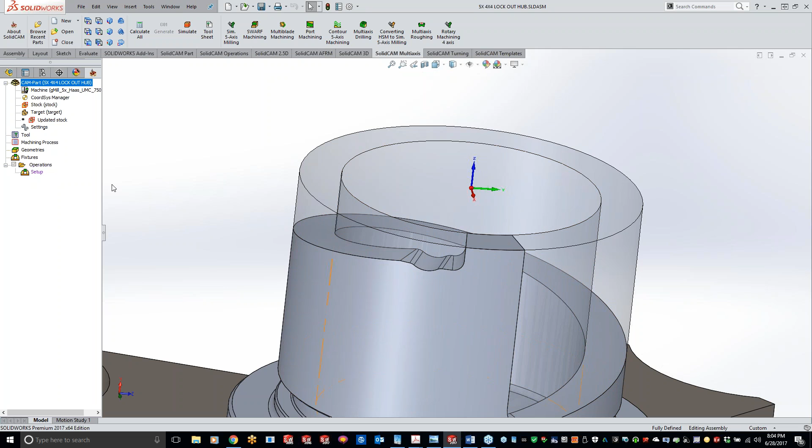All right, so right here, this is actually the 4x4 lockout hub off of the older F-150s. Greg got this part, and back in the day the Fords had a plastic one, and now this replacement is a metal one. So what we'll do first is let's just do our 3D iMachining.

And I'm just going to leave it on 3D General here. I'm gonna grab my tool, and we'll use tool number 1 here. And we'll just leave it at that. Let's just do a quick save and calculate here. And we got our toolpath in there.

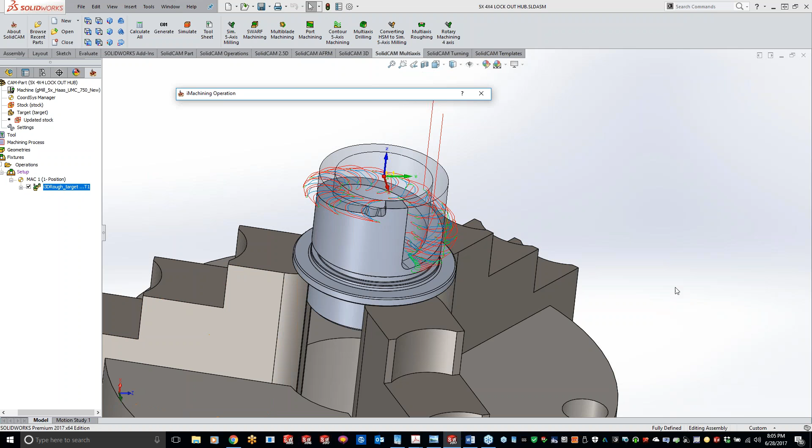The only thing I want to change is my scallop height. So if I go to technology, and instead of doing scallop, I'm going to do a constant of, let's just do 40 thou. Oops. Save and calculate.

And I know this is just a little bit of a refresh of 3D iMachining here, but I kind of want to take you guys from start to finish on these parts here. Okay, so let's do a solid verify. All right, so we have that completely roughed out, and you'll see that I left 15 thou on the wall and the floor. So now we can come back and do our 5-axis parallel to the curve.

So real easy to use. Pretty close to the same thing as what we went over last week here, but just go ahead and grab your parallel to the curve. Now my geometry is, whoop, let me get rid of my toolpath there. So my geometry is going to be all this top surface right here. I can click all the way around that, but I got it ready here for us.

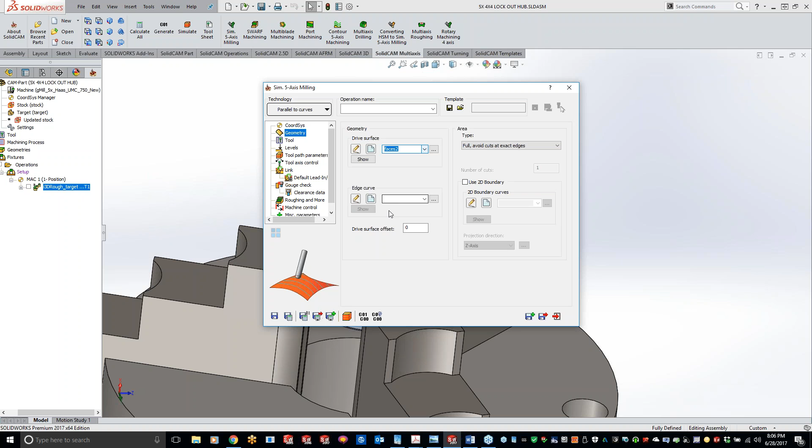Now the inside geometry that I want to use is the inside of the curve. And I think I got this one. So let me just do a show real quick. And basically just grabbing that inside curve geometry going all the way around. So you'll see kind of going around the parallel and then kind of coming back up there.

Now, what I want to do for this one is I just want to do somewhat like a trimming pass, but just want to do one cut. I don't care to do multiple step downs or step overs, anything like that. So I can come over here, just like HSS, and I'm going to do determined by number of cuts, and we'll leave that at 1. We'll go ahead and grab our tool number 2 here, and go to our levels here, and I'm going to switch this to plane to cylinder. And my cylinder, let's just go 2 inches.

Toolpath parameters, nothing I really need to change in here at all. My step over really doesn't matter right now just because we're just doing one cut. So let's get over to the tool axis control. So I'm going to leave it tilted relative to cutting direction. I'm going to leave the lag angle at 0, but I want to use the side of my cutter when I go to use that. So I'm going to tip this over at 90 degrees.

Kev, I just want to interrupt 1 second. Ronnie asked, why no outside curve? Oh, you can do inside or outside, Ronnie. It wouldn't matter on this one. So now, actually, maybe if we did the outside, my tool wouldn't be going as deep. So right now, when we go to throw toolpath on here, it's going to come up to that line. We may try that, Ronnie.

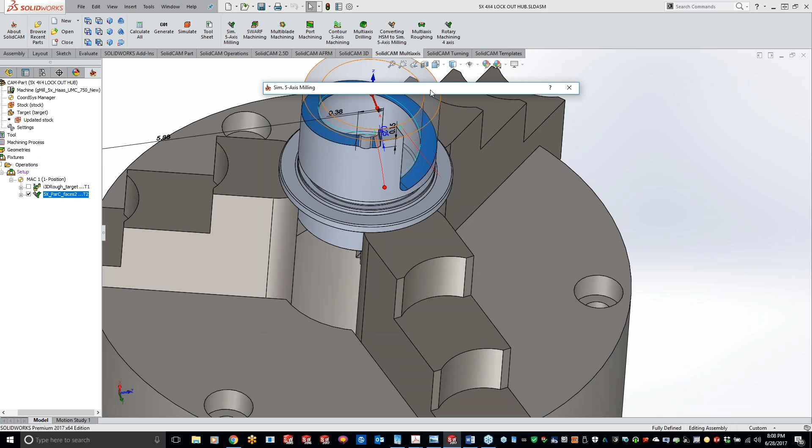Okay, so let's do orthogonal to each position, and let's just do a save and calculate. And you can see that I'm coming in there with the side of the cutter, and we're going in and dropping in and going around. Now, if I wanted to, I can reverse the direction. If I wanted to start over here, I can easily do that. But let me just show you something here. Let's just do a solid verify for a second.

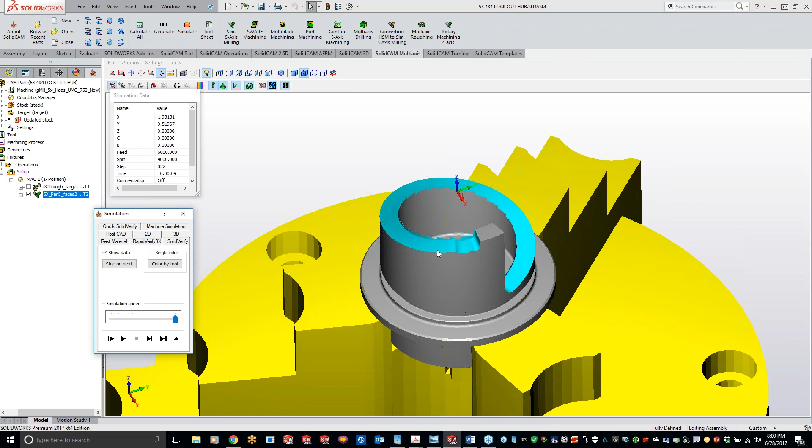You'll see that I'm not getting in deep enough here. You'll see I got a little bit of material kind of going all the way around. And Ronnie, I think this is why you don't want to do the inside versus outside, but like I said, we can double check this here. But I got that little bit extra material. Same thing as HSS like before. So what we can do is come to our toolpath parameters, and under, what am I looking for here? Advanced right here. And then I can put a negative value in there of, like, minus 0.2, for instance.

So now you'll see that we're actually going much deeper inside there. I probably didn't even need to go 200 thou, that's quite a bit. Let's just go 0, 50 thou.

And now you can see that we're going much deeper in there, and get a straight down view for you guys here. You can see our toolpath is down in there, just by modifying your shift for that toolpath.

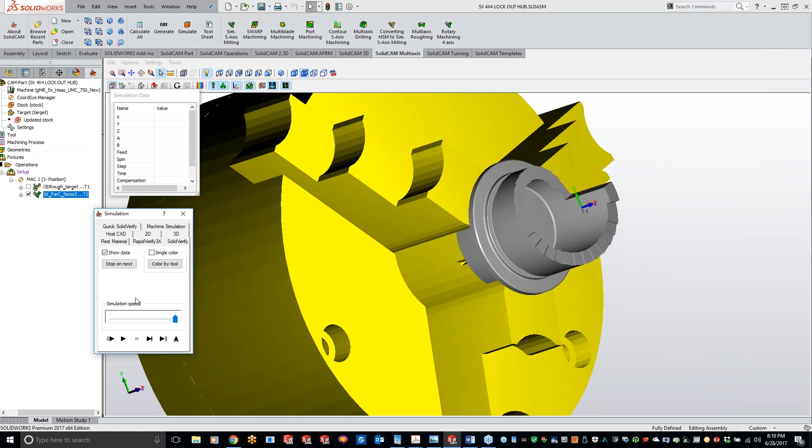So if we do a simulation now, I'll slow it down here. You'll see that our cutter is definitely overlapping. Now we don't have to worry about not getting engaged deep enough with that material.

Now, like I said, if I wanted to, I could switch that around so I'm starting on the opposite end. We'll just play through here.

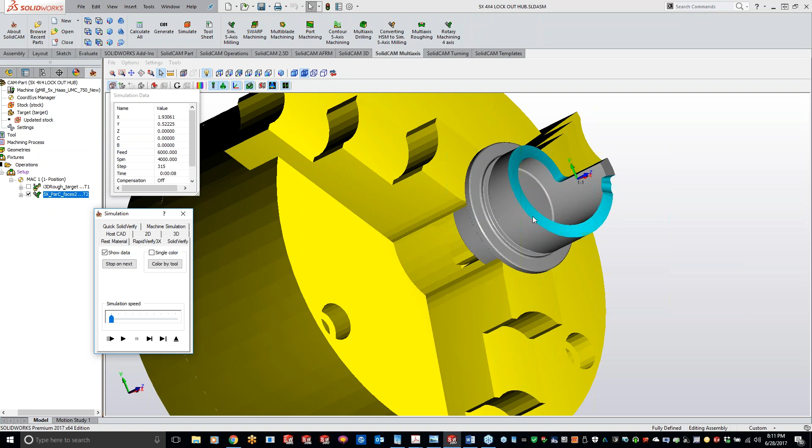Now, basically what I'm telling it to do is stay 90 degrees to that cutting direction at each position as it's going around that surface, using a side tilt angle of 90 degrees. Let me just play this through here again.

So what I'm saying is we want the ball, let's get a good zoom down shot here. So this bottom portion of the ball is 90 degrees to that surface, but also we're kicking the cutter over at 90 degrees also to the coordinate system, I guess you could say. Hopefully that kind of makes sense for you guys.

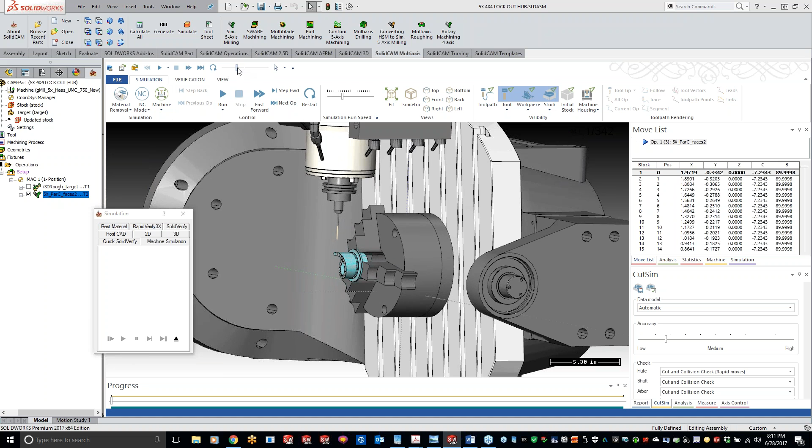Let's do a machine sim real quick. Okay, so we're rotated around here, and let me just slow it down just a little bit here. You can kind of see exactly what's going on here.

And you'll see the trunnion rocked back and forth to accommodate being orthogonal to that surface. You should see it do it again right here. Very small little bit, and then it comes right back up.

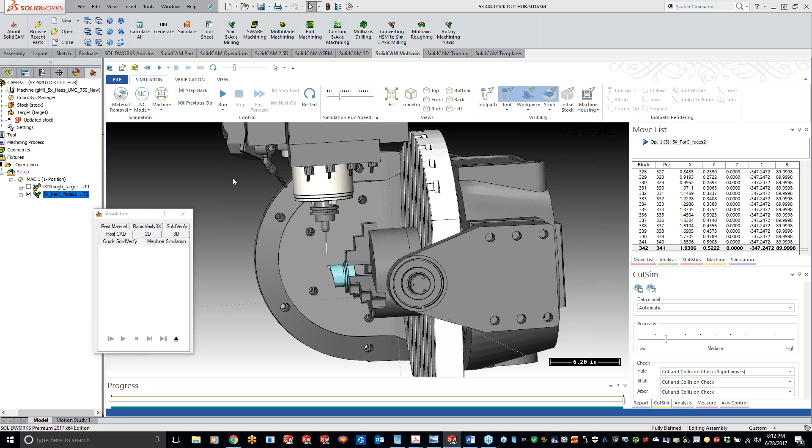So, like I said, if I wanted to, I can come in here and under the regular toolpath parameters, flip my step over. So if I do save and calculate now, it's still starting at the same spot.

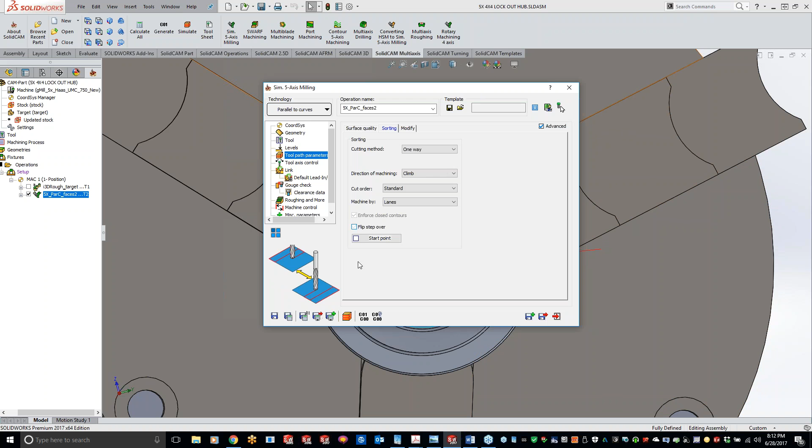Turn it off from zigzag to one way. So now we're starting out over here. Now if I do the flip, it will start on the opposite side. And it's not.

Okay, I've got to see what's going on here. One way. Okay, that will flip it over. Not sure what I'm missing here.

Ronnie says that you didn't check the box. Maybe if I just uncheck it. Okay, so let's save and calculate here. Okay, uncheck the flip.

Huh. Well, that should be doing it. Trying to think what else I'm missing here. Should be on one way. Cut order, Ronnie says.

Yeah, but I did, let's try that. No, I cannot get that thing to flip over for us. Well, I'll have to look into that, why it's not flipping for us.

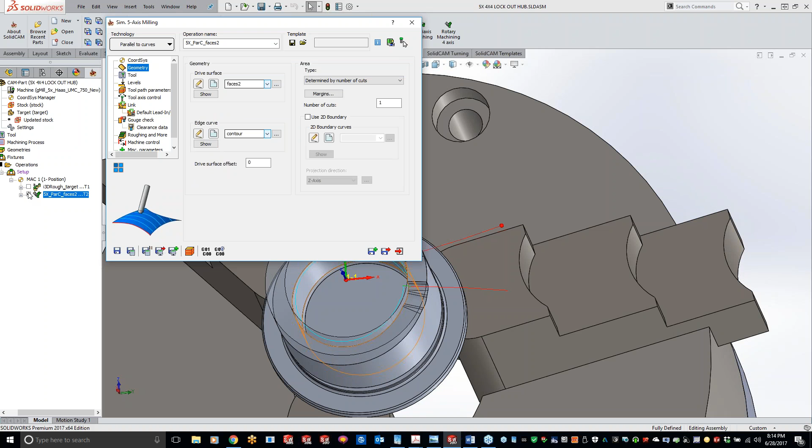Okay, so now, can I get off topic here now? So let's take and look at what Ronnie was saying before about the geometry. If we go to our edge curve, instead of picking the inside, we'll pick the outside.

And it should grab us going down. Get kind of rotated around here. Oop, undo. And we'll flip the one up.

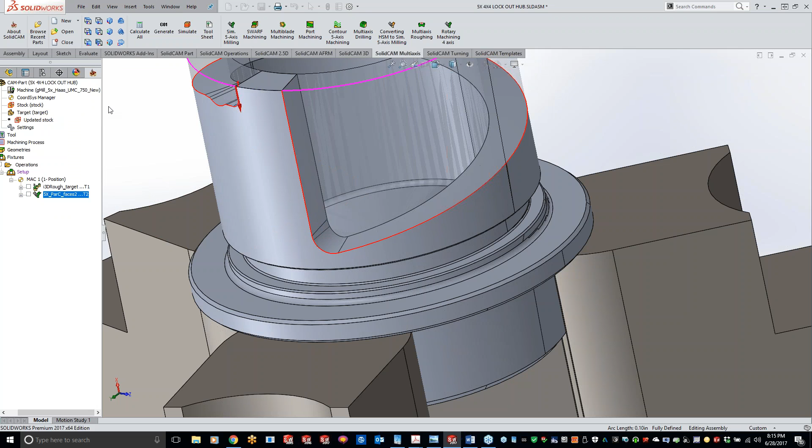Yep, so it's throwing that line on the outside versus the inside. So that kind of determines your levels a little bit.

So each surface is going to be different for you guys. I really wish I could say no matter what, it's going to always do this with any surface you run across, but since we are working on the actual SolidWorks file itself on the surface NURB, it's really unknown how that surface was built, how everything was merged together, all that stuff.

So, okay, any questions on this part right here? And let me just switch this back here. I'm still completely baffled on why my flip over is not working, but...

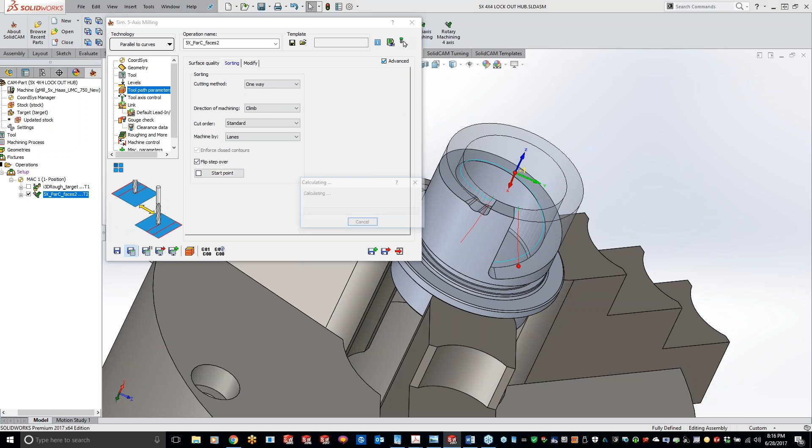So if we go to Machine Sim, get everything loaded up here. If you want to see the whole housing, you can kind of zoom in there and play her through.

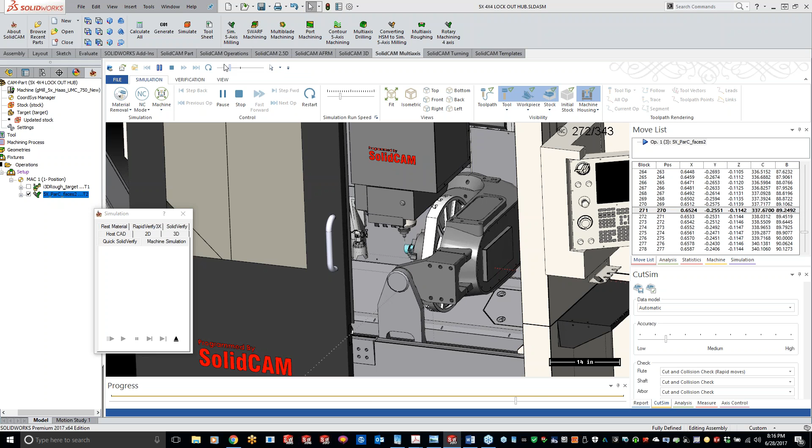And we're done. So, okay. Starting off with a little simplified part there. Any questions with this particular one right here?

All right, so let's get into another one here.

Now, I know last week we had some issues with the screen not refreshing as fast as it was. Are you guys able to see everything go through pretty fluently? I know last week we had a huge storm rolling through. I don't know if that's what did it, but it seems fine.

Yeah, everything looks good on my end, Kev. Everyone's saying the refresh rate looks much better this week. Perfect, good deal. I apologize for that last week. We had a huge storm come through, it was hailing and everything, and I don't know if that affected it or not.

So let's get going on this part right here. I kind of turned it down already, and now let's get into the 5-axis. For this one, I'm just going to grab contour, show it here, milling out, get my part flipped around, milling out that triangle right there.

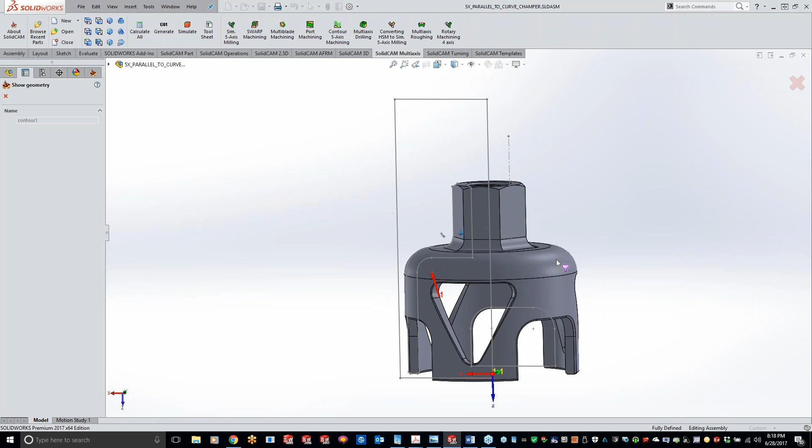Let's grab our tool here. Levels, I'll just say 150 thou deep, and we can do step downs of 75 thou. The only other thing I want to do is throw a wall offset of 5 thou in there, so I can come back and use that 5-axis and get the head to rotate and follow that surface the way I'm looking for.

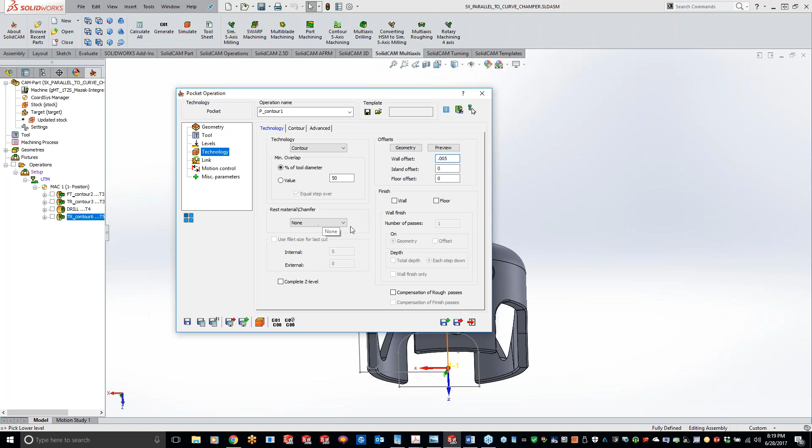Let's just do save and calculate. And it looks exactly what we're looking for here. So I'm going to do a quick transform and include the original. Since we have 3 of them, it's 120 degrees.

Okay, so we got those pockets all machined out there. Simple, easy, kind of a refresh there. Let's go ahead and do another pocket here.

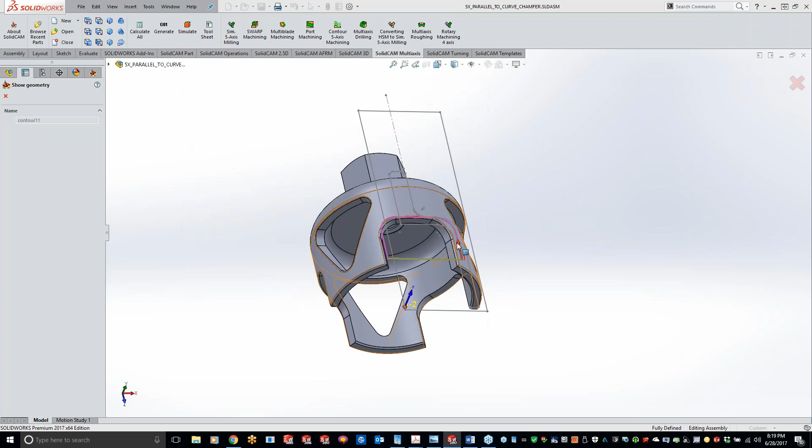I'm going to grab position 2 for this one, and grab my contour 11, show you guys that. So just doing this pocket right here. Let me get this toolpath turned off for you guys. We're just machining out this pocket as an open edge.

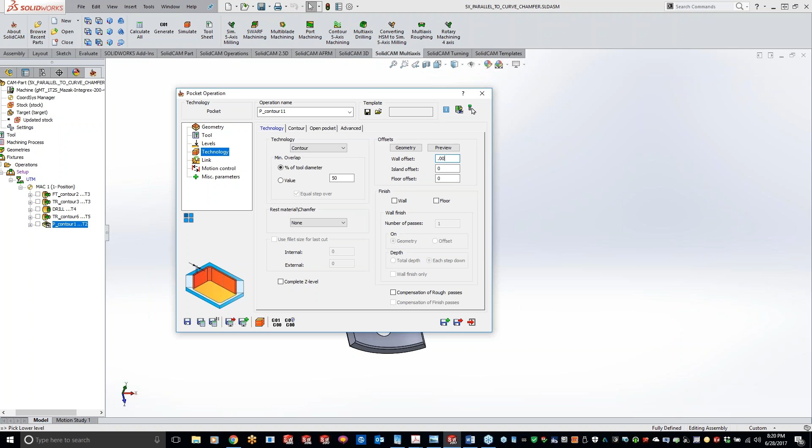Grab that same tool number 2 there. Let's see, we can just go 300 thou deep to get everything there. And technology-wise, I'm going to leave that same 5 thou on the wall. Let's just do a save and calculate.

Looks good there. The only thing is I'm not starting from the outside. So let me go to open pocket, approach from outside. Beautiful, okay, so let's transform that again.

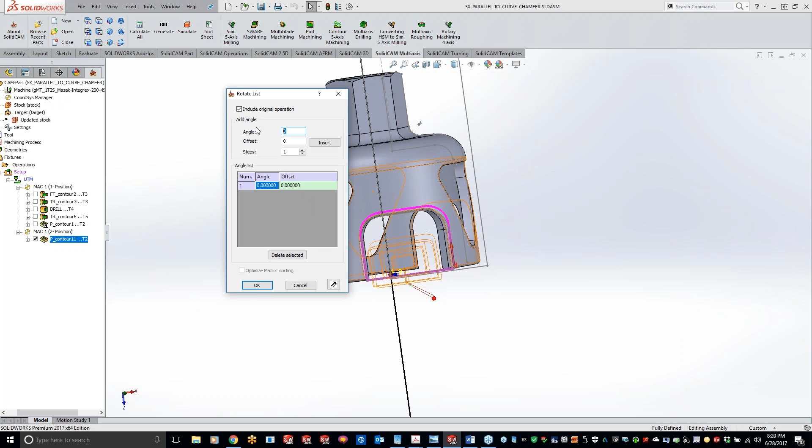All right, so it looks like we're cutting everything that we need to there. Let's just simulate to get a verification on it. So we got our triangles cut out there.

Okay, so we got those pockets cut out now. Now let's get into the 5-axis portion here. Do our 5-axis, turn off that toolpath here, and we'll do our parallel to curve.

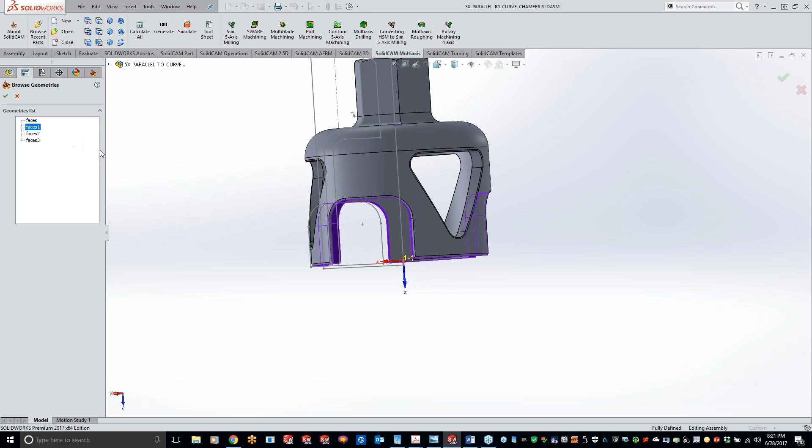I'm going to grab, let's see what I got here. Yeah, that'll work to get that outside. I've got to find my contour that I'm looking for here. There we go, going around that outside perimeter here.

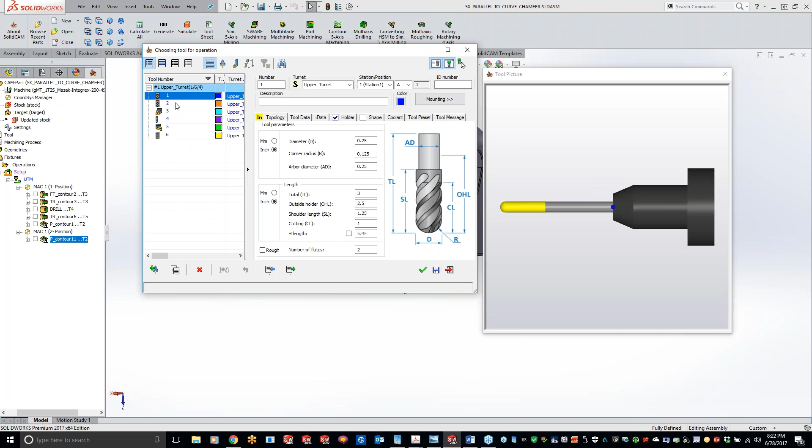Like what we did before, I'm going to do determine by number of cuts. Go ahead and grab our tool number 2 here, and switch this over to cylinder, 1.25, oops.

Does anybody know what this part looks like? It's actually supposed to be a hole saw.

Okay, let's go to toolpath parameters. Nothing I should really have to do right here, so now I'm going to leave it on default, tilted relative to cutting direction. Same thing as what we kind of just went over with that 4x4 hub.

Then I want to lay it on the side, so I'm going to do 90 degrees, and we'll do orthogonal to each position. Let's just do a save and calculate, and let's go ahead and do a simulate here.

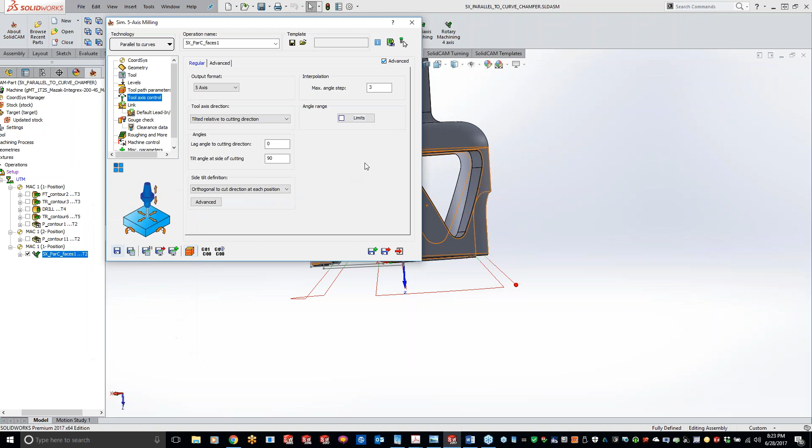And I need to go deeper, I'm not getting deep enough in there. So we'll go to advanced, let's just do a 50 thou. See that dropped our toolpath down inside there.

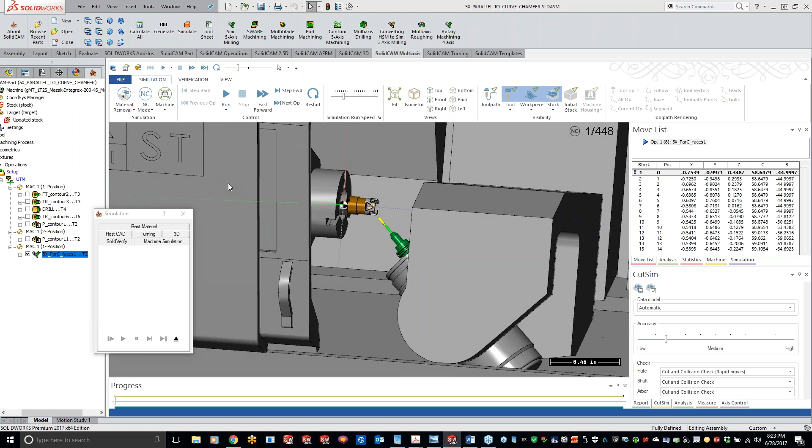Let's just try a machine sim for this one here, trying to get different machine sims for you guys here. And let's go ahead and play this through.

Hang on one second, I ran into this last week. What I forgot to do last week when that head was rotated all the way around, if you guys go to your machine controls, turn on the rotation limits.

Get everything loaded up here, and let's play this through. Zoom out for you guys a little bit to see it. All right.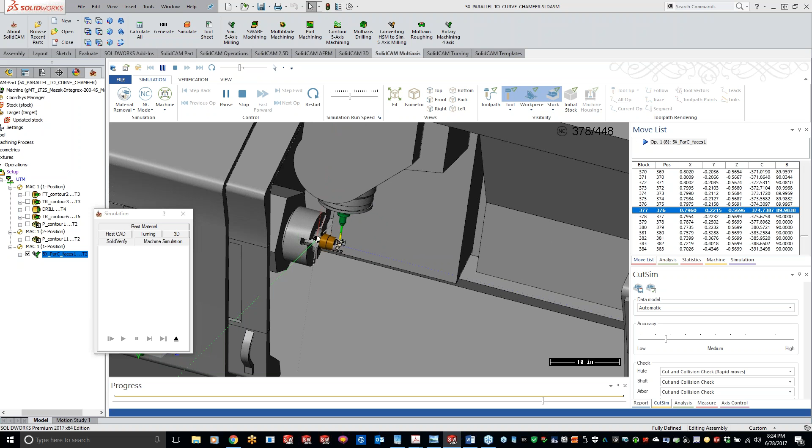All right, looks good. So telling it to stay 90 degrees to that surface. Kind of wish they would just change the wording on this orthogonal. I really don't like that, but it's just like 90 degrees to cutting direction at each position.

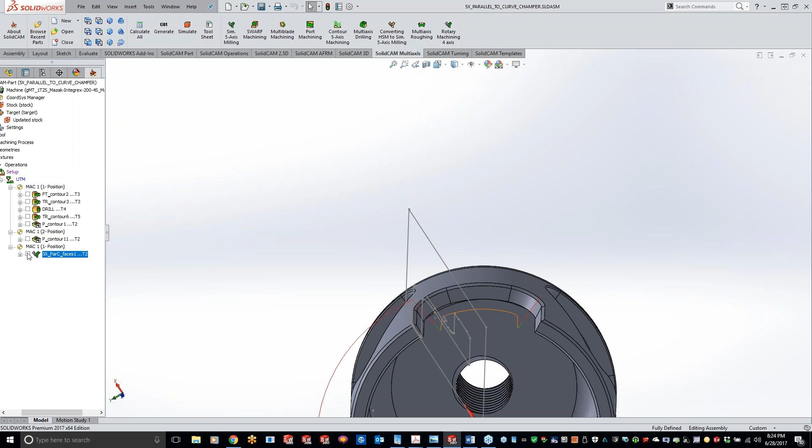Okay, so let's do another 5-axis one, and do a parallel to the curve again. And now, so grabbed, nope, there we go. So I'm going to be doing that, our inside triangle now.

Edge curve, let's follow the curve of that. And gotta find my triangle one here. There we go.

And like we were talking before, you see that pick the bottom versus the top, and that's just to accommodate that Z depth. So now I'll do determined by number of cuts. Go ahead and grab that, the tool number 6 here.

Levels, you know, I can actually leave it on plane since we're going to do a 4-axis transform on this one. So I'm just going to leave that for right now.

Toolpath parameters. One thing I'm going to do in here is I'm going to come into the corner rounder, or the round corners here, and just put a 2 thou in there. Let's change it up a little bit here.

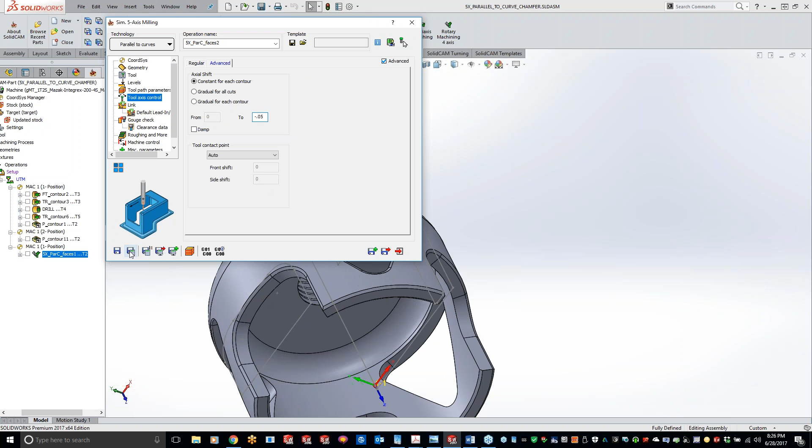And the only other thing that I need to do is I got to change my side tilt angle to 90 degrees again, and I know I'm going to need to go past again, so I'm going to do that minus 50 thou, and save and calculate. So we're coming in there, buzzing around the outside of that using the 90 degrees to that surface.

Let's just do a simulate here, get a sanity check. And I'm going to slow this down here.

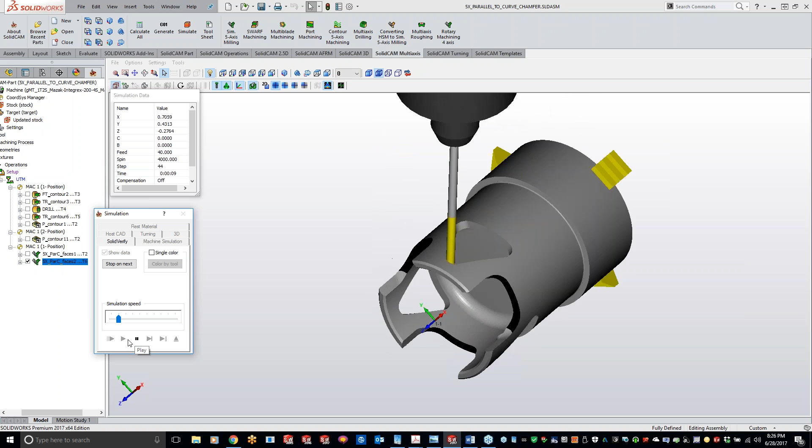And it's really hard with the SolidVerify to actually see what's actually going on. I mean, we just see the tool kind of buzzing around, but I really like to bring that machine sim in there and really see what that head is doing.

All right, let's play this through here. And you can kind of see a little bit of the head rocking back and forth a little bit. Okay, so that's exactly what we're looking for.

So, like I was mentioning before, HSS has the transform feature now. Now, I know a lot of you guys aren't sitting at your desk right now, but if you guys don't have this, let me know.

And let me see if I just still have it in my edit here. So what I had to do is I had to add this key in here, 5-axis transform enabled. This is going to enable your HSS and your 5-axis. It has to be this file format exactly, case sensitive and everything.

Like I said, I downloaded on the one computer, it had it, and this computer didn't have it, so I had to add it in there. So if you guys don't have that capability, let me know and I can copy and paste this key out, or I'll copy and put it in the chat log for you guys.

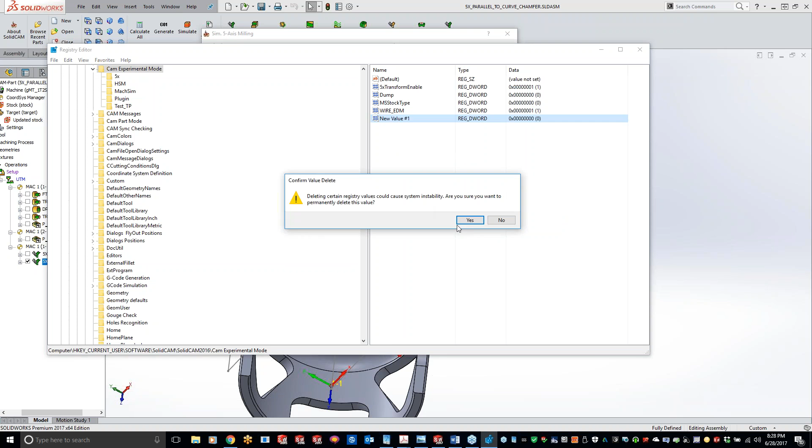And if you guys aren't comfortable doing that, definitely give us a call on the support desk and we will add this in there for you, because if you don't know too much about computers and mess up something at the level here, accidentally delete this, you just turn your computer into nothing, a paperweight. So definitely let us know if you do have questions on that.

So, okay, we'll get into the, oh, go ahead, Scott.

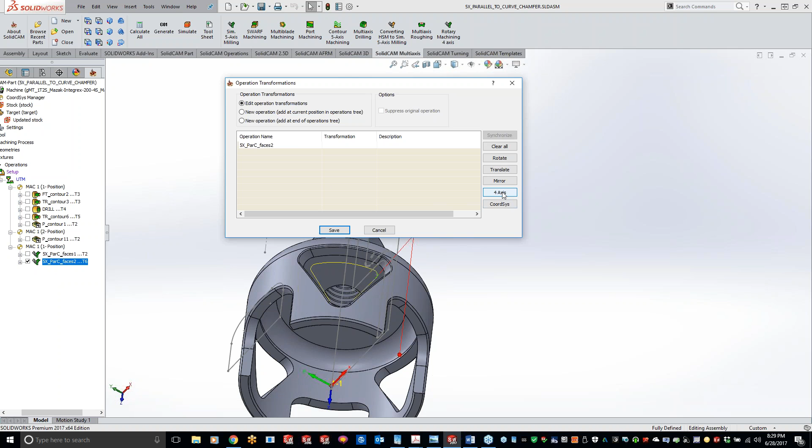No, I was just agreeing with you, and I was getting ready to say the same thing. Just call us at the support desk if they're not comfortable with that. I've messed my registry up before, thinking I knew more than I did. Yeah, you can definitely get yourself into a lot of trouble real quick in that registry.

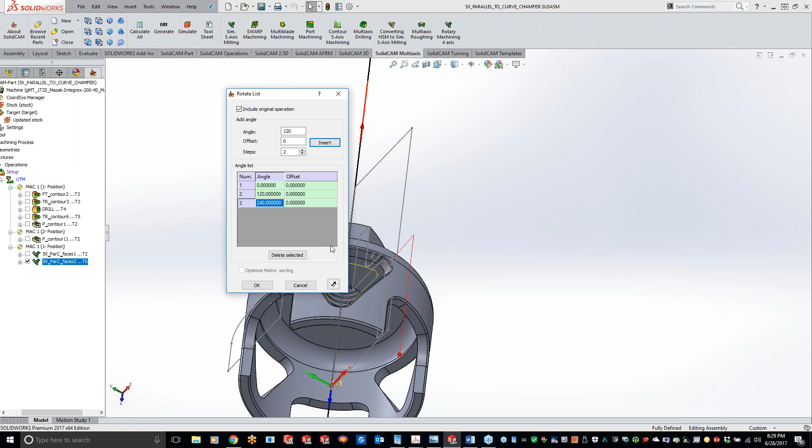So, but now you'll see I have the capability to do a transform, which is really cool. So do a save, and now let's go ahead and do a simulate here.

Get kind of zoomed in on our machine. Maybe we can speed it up a little bit for you guys. And so now, when you guys are running a part, since you have similar geometry, definitely take advantage of that transform. If you guys wouldn't have that, before, what you'd have to do is we could try doing it all in one operation, but I would definitely recommend breaking it out.

And same thing with HSS. You guys are working on a surface over here, and then on a different side of the part, you're working on a different surface. You can do those together. You may have to do a little bit more tweaking, but it makes life a lot easier if you guys just separate them out.

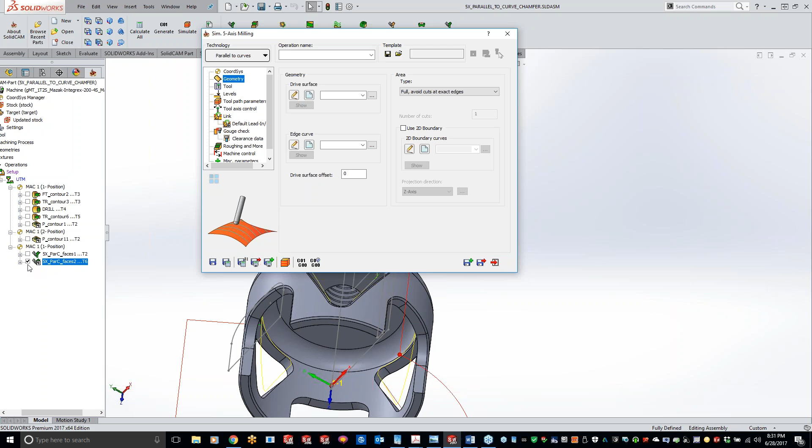Okay. So now let's go ahead and do some trimming, or the chamfer. Do our 5-axis here, parallel to curve. And I always forget to shut that toolpath off. And chamfer that triangle that we cut out. And our curve is going to be, I think it's our top one here. Yep, contour. And we'll do determined by number of cuts. I think we'll use a ball end mill for this one here.

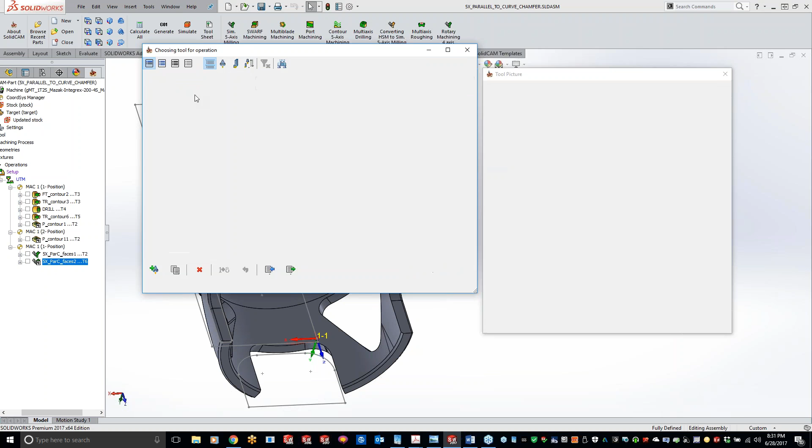And levels, we can leave it on plane, like I said, because we're doing a 4-axis transform here. So toolpath parameters, since we're doing determined by number of cuts, really doesn't matter. Tool axis control. So right now I'm going to leave these at 0, so the tip of that ball is working on that surface. But I'm going to tell it to follow the ISO line direction, so follow along the direction of that contour going all the way through.

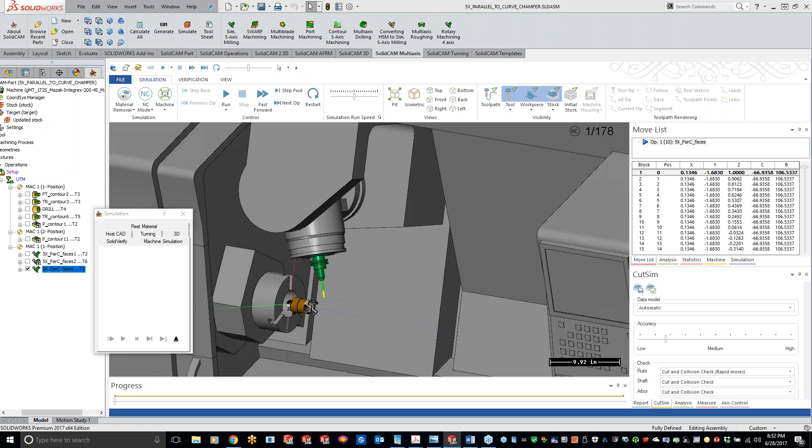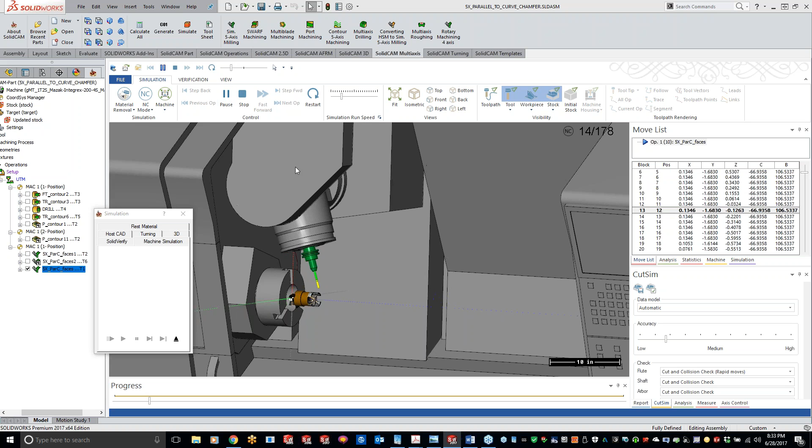So now let's just do a save and calculate here. Kind of coming in there. And I already see a problem here, but let's just go to the machine sim. Okay, so let's go ahead and play this through slow here. And right there, I don't have my crashing enabled right now, but if we restart that here, you'll see that my head actually, right there. If I would have had my crash detection turned on, that would have showed up red for you guys. So what can we do to fix that?

A couple different things, but we can come to our angle range, and I can just limit my angle. So right now, I'm going from my B axis from 0 to 360. So if I limit this down to just even 180 degrees. So you can calculate here, simulate. Let's get in here again. So now it's going to rotate 180 degrees. It's not going to go the full 360 degrees. So when it gets to do that backside, I'm kind of locking it down, keeping the head from going into the spindle there. So a real nice feature in there.

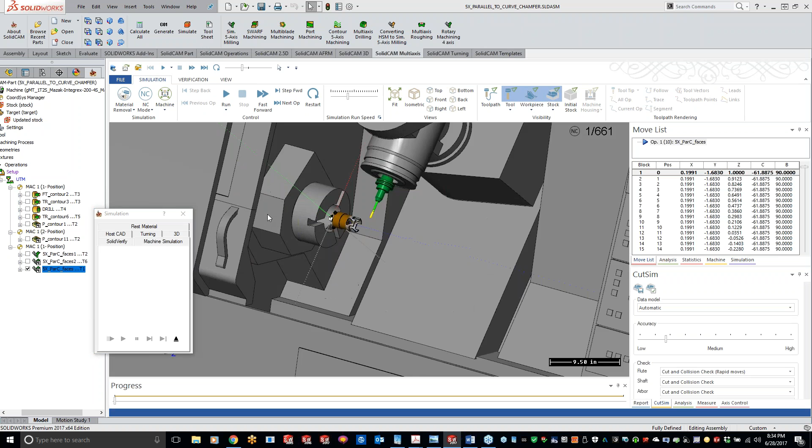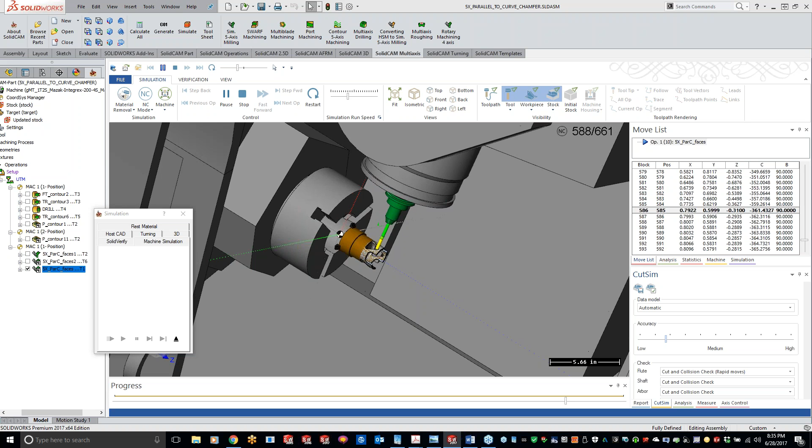So now that I have my one done, like I said, instead of chaining all those, let's just do a 4-axis and do our same 120, insert my other 2 steps. And let's play this bad boy through. So following those ISO lines, it wants to rotate that head around, but like I said, we're locking it down so it can't. But leaving a nice chamfer, or like a trim, going all the way around the outside edge of that part. If I need to go a little bit deeper, we could go to that advanced tab and do a negative value like I was showing you guys before here.

Okay, so now, Kev, yep. Ronnie asked to please show the limit box again. Oh, right here. So right in your tool axis control, angle range right here, and I'm limiting my B axis so it doesn't rotate. Now it's all going to depend on what axis you guys want to lock down. So right now I told my B only 0 to 180, but my A axis can go 360 degrees, and if I had a C and a W, those could also go out. So that's where she is, Ronnie. Okay.

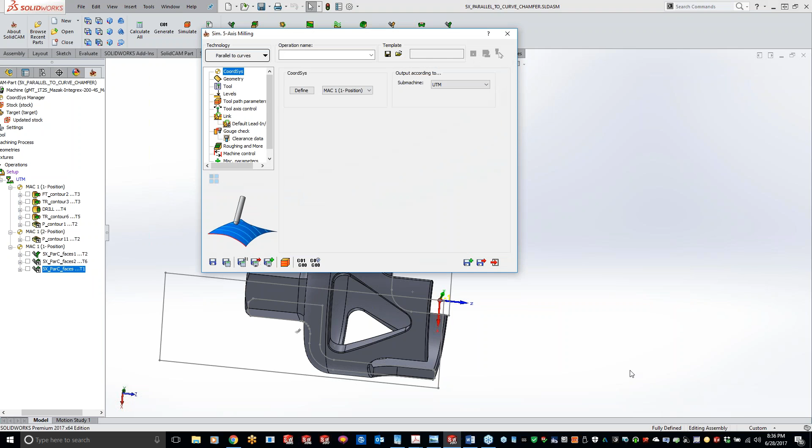Now, the only thing I have left to do is my outside perimeter, going all the way around the outside of the part here, doing that same chamfer. So this one I really don't need to do a transform because I want to go all the way around the outside too. So let's just go to geometry, and I think that's the one I'm looking for.

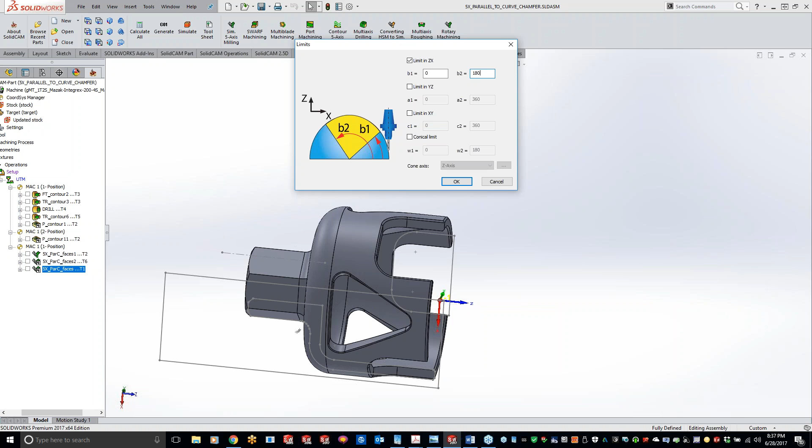There we go. And same thing, determined by number of cuts here. Grab that same end mill. Levels, now I'm going to want to switch this over to cylinder here to go for that, so let's run to cylinder. Toolpath parameters, really not going to worry about what's going on there. Now what I'm going to do is I'm going to tell it to stay 0 and following the ISO lines like what we said before here, and I'm going to limit my angle to that 180 degrees of movement, and we should be good.

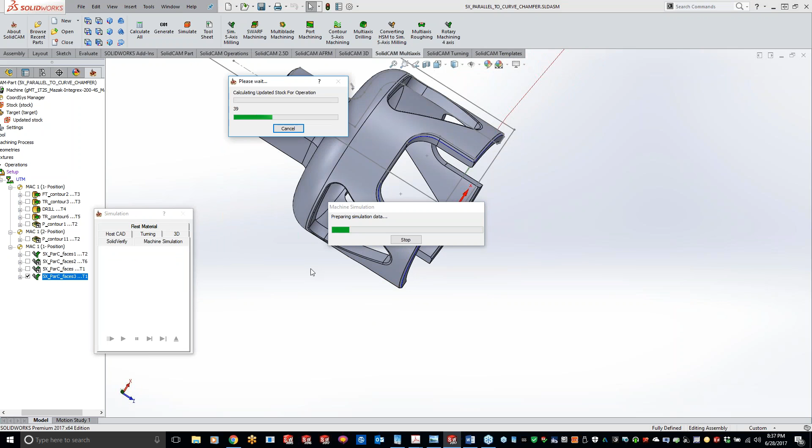So let's minimize this for a second. You can see coming in there, moving all the way around, going around that outside edge, all the way around, getting that trim or that chamfer put on there. Let's go ahead and do a simulate here. Zoomed out a little bit there. There we go. Did that go too fast for you guys? Slow it down just a little bit here.

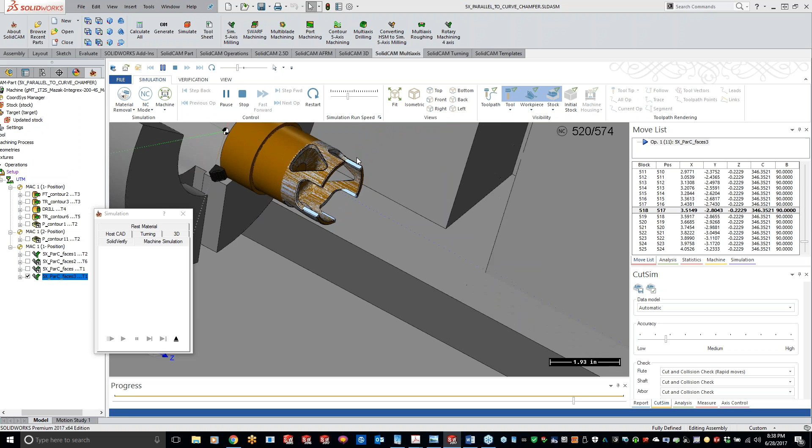So just following that outside chamfer, working right on just the tip of that cutter, and basically kind of using it as like a deburring. All right. Any questions on this part here before we jump to our next one? Okay, looks like we're good. All right.

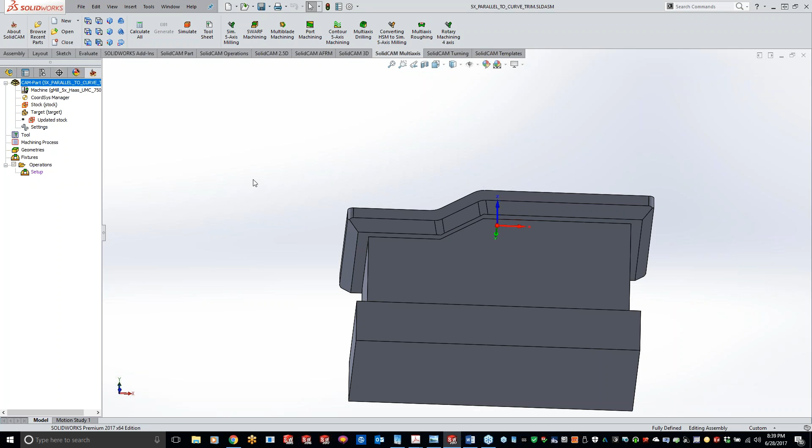So let's go ahead and move to our next part here, our last part for the night. And so this is a little bit of a simplified one here. Basically the only thing that we are doing 5-axis on here is this outside perimeter that's going on right here. So pretty much along the same lines that we've been going throughout the night. And like I said, with this 5-axis and the head tilt, the lead and lag and all that stuff, pretty much the default values are pretty good for the most part.

And like I said, you guys are going to come across some other ones in there that you may have to use. I'm trying to show you guys as much as I can and get different parts to show different features that we can use in there, but for the most part it's pretty simple. Okay, so we got that outside perimeter, looks good.

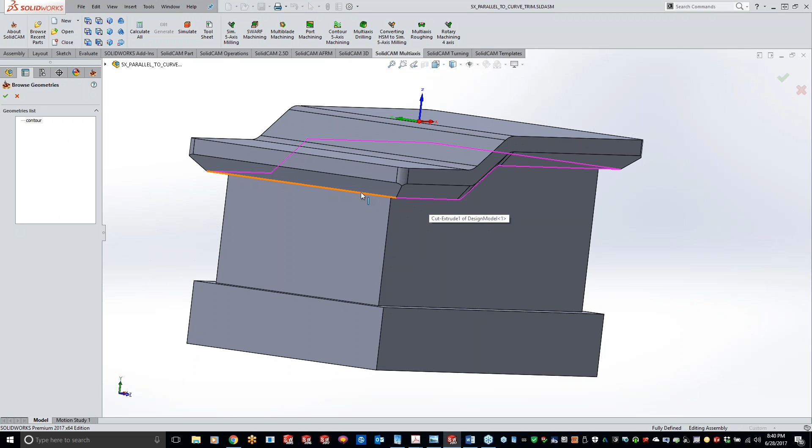And chaining the outside, or the inside I guess you would call it, and this is just to accommodate, so the tool will go down to this point right here. Obviously I'm going to want to go just a little bit deeper past, so I'm not working right on the tip. If we are, we're going to have a little bit of an edge going all the way around. So grab that contour there. Determine the number of cuts again. So we'll just do one single cut going all the way around. Grab my one and only tool.

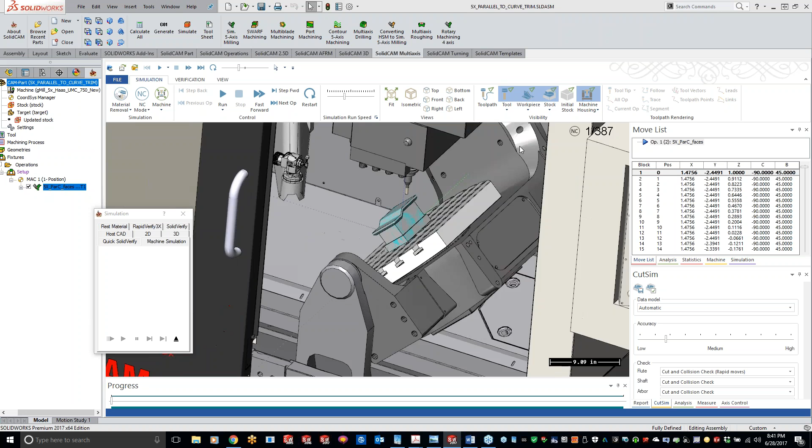Toolpath parameters, really not going to worry about it here much. Tool axis control, kind of leave it defaulted right here, but I want to work on the side of the cutter. I don't want to work on the bottom flat. So I'm going to kick this over to 90 degrees. And let's do a save and calculate. I'm going to do a machine sim on this one too. And let's go ahead and play this through. Keeping that tool 90 degrees to that surface the entire time.

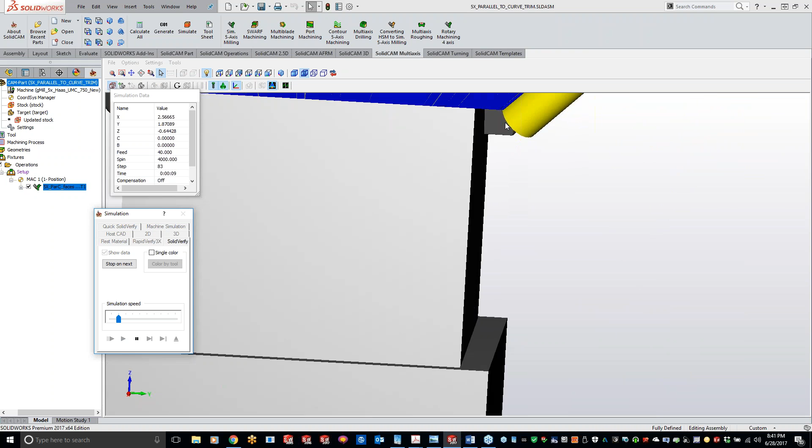There we go. Now the only thing I forgot to do is on this part right here, probably want to bring my Z down a little bit to go a little bit past. And if we just do a solid verify, you can see that cutter is going, if I can catch it here, staying about 50 thou deeper than what we told it for that edge curve. Sorry, I'm trying to race it around here.

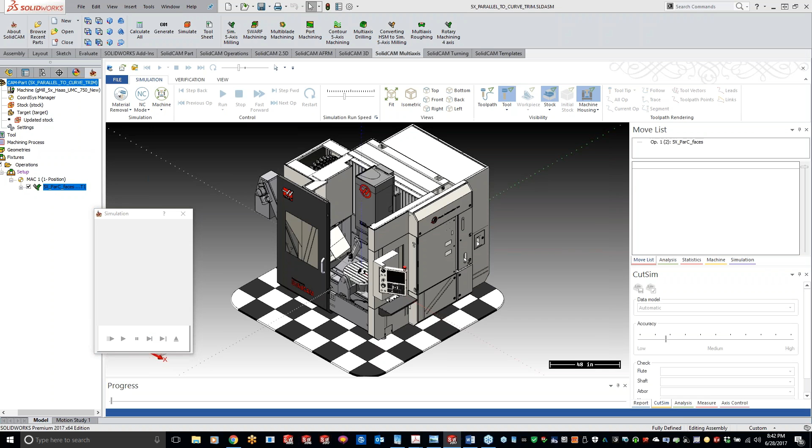Now if we want to, we can go ahead and hop over to Machine Sim. Play that one through again here. Get rid of our machine shroud here.

Just like that. So any questions, guys, with the parallel to curve? That's pretty much about all I have for tonight for the parallel to curve. Like I said, kind of real interesting, using that transform right there and really being able to simplify a lot of the operation, especially on that last part that we did there. So, yeah. Now, Ronnie asked if that's cutting into the part.

Oh, let's take a look here. It probably could be because I didn't even have a gouge check turned on. Let's try it. Speed this up here. Yep, right here we're gouging in right here. And let's check on the other side too here. Yep, good catch, Ronnie. So let's go to our gouge check, enable.

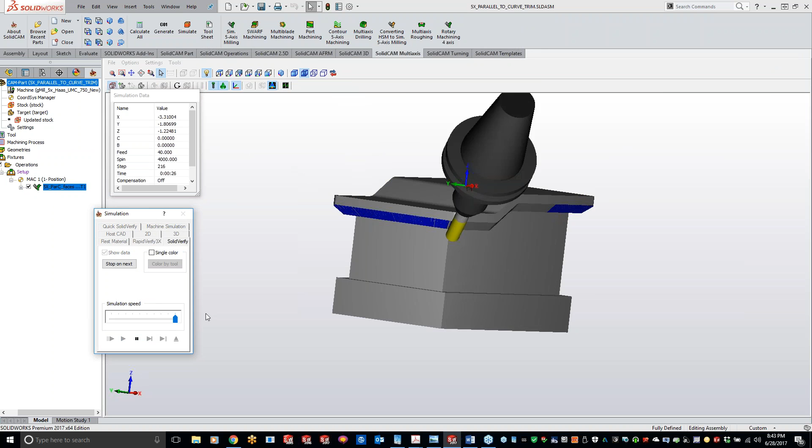And now let's take a peek here. Looks like we're good, because I got 4/10 tolerance here, and let me just see my accuracy. Yeah, we should be good. Let me check all the way around here. Yeah, so it looks like we're good there. That's because of the radius of the tool. Yeah, so what Ronnie's saying is pretty much the radius of the tool trying to get in here, going around, so you can definitely see a little bit of difference.

And that's why I definitely use your solid verify and that stock target comparison, and come in there and check all of it. Completely overlooked the gouge check on this particular one here, but especially with the 5-axis, make sure you get your holder and arbor all turned on. So if you guys do get into a bind, at least you're catching it on the machine sim, one, and then two, kind of like with that part we did last week, where that entire holder and everything was doing a gouge check against that fin on the right-hand side.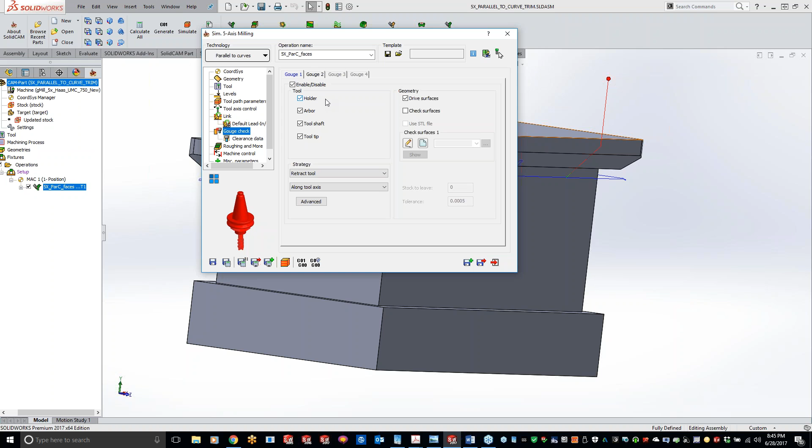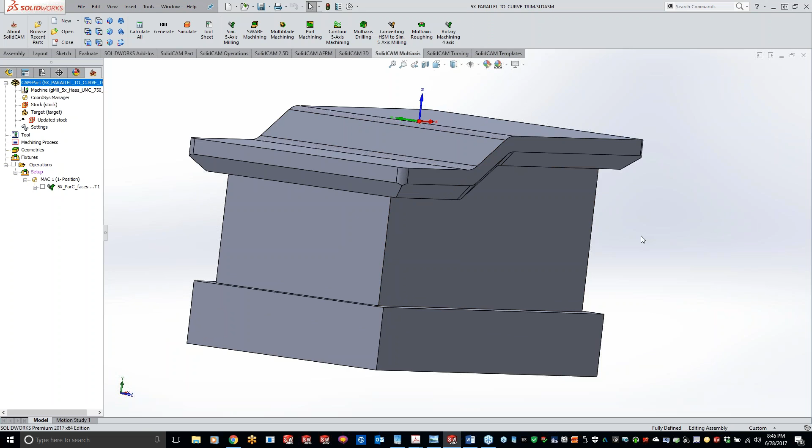If you guys want, I can bring that part back up here. And Kev, Ronnie wanted to know how much smaller tool do you use compared to the radius? Oh, let me grab that part again here. Yeah. I guess I didn't even look at the radius diameter in there. So we got a radius, well, I got an arc length. I don't know about you guys, but I can't stand when it gives me an arc length. I just want a radius. So let's just grab tools.

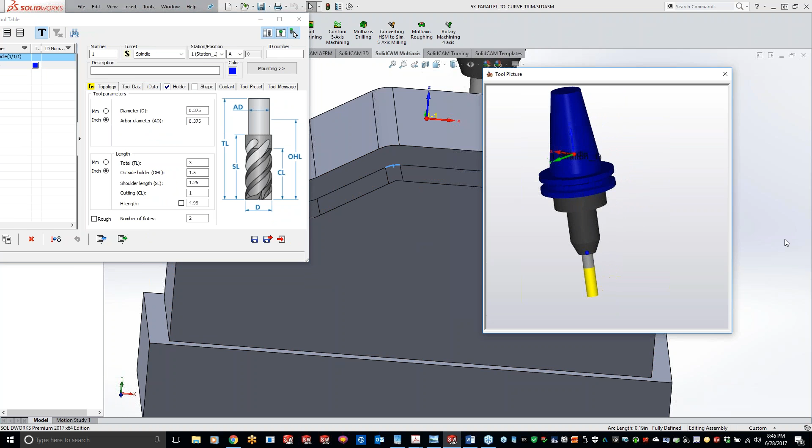And we're using, let me close this, try to get this part. We're using quite a bit larger than what we're supposed to have here. So it's definitely seen an issue there. But to give you a 100% answer, I can't tell you, Ronnie, but let's just switch it over to a 0.25. And we'll do save and exit. Come in here. Save and calculate. And I'm going to just turn off that gouge check and see if it still does it here.

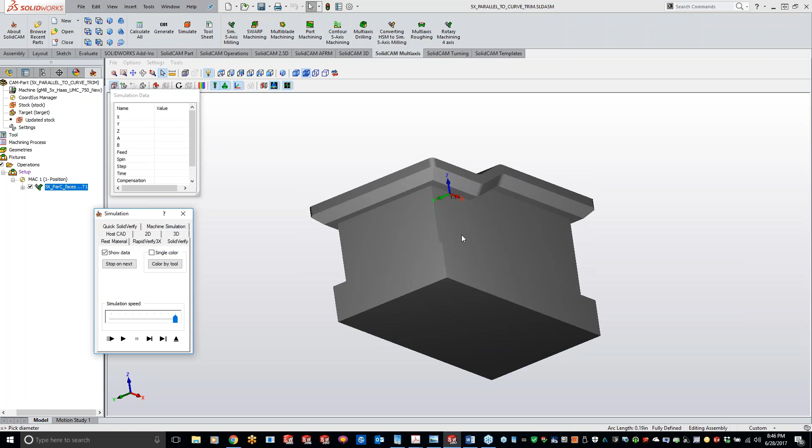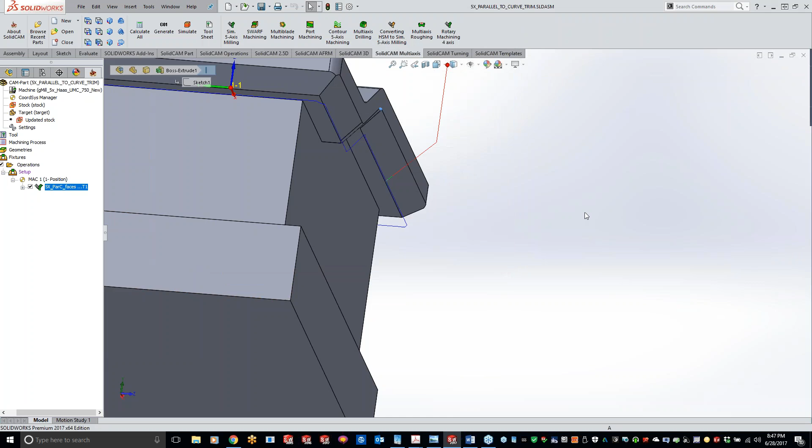Jeff mentioned that you can measure radii with the evaluate curvature tool. I'm going to check that out. Yeah, we're still gouging in just a little bit, Ronnie, and I'm guessing because it's trying to get in that little pocket right there, so I'm not sure how much smaller we'd have to go with the tool, but let's check Jeff's comment here. Get over to the radius. So we got arc length, and go to our evaluate, measure.

All right. Curvature. What am I missing here? And now it says no curvature, so I guess it's not there. Jeff, you may have me a little stumped here. I'm not sure what you mean by the colored curvature button. Colored curvature button. Oh, right here. And hover over a curve on the model, he says. 0.5? Is that what it's telling me? Yeah, it looks like it. Cool. I've never tried that out. Thanks, Jeff. Learned something new tonight.

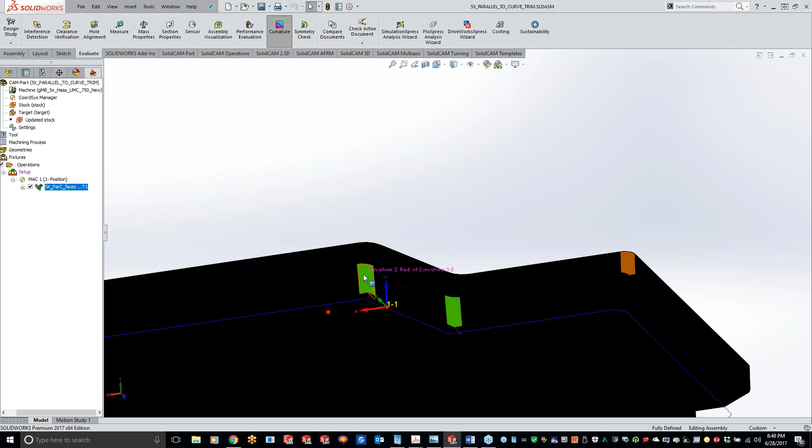So for those of you guys like myself, what I would normally do is come in here and draw a sketch with a circle, so I could get my radius instead of getting an arc length. Go to your curvature tool and just hover over it, and it's going to give the radius of what you have there. So very cool. Thank you, Jeff. Yeah, that's cool. I never even played with that one. Guess that's what happens when you're self-taught.

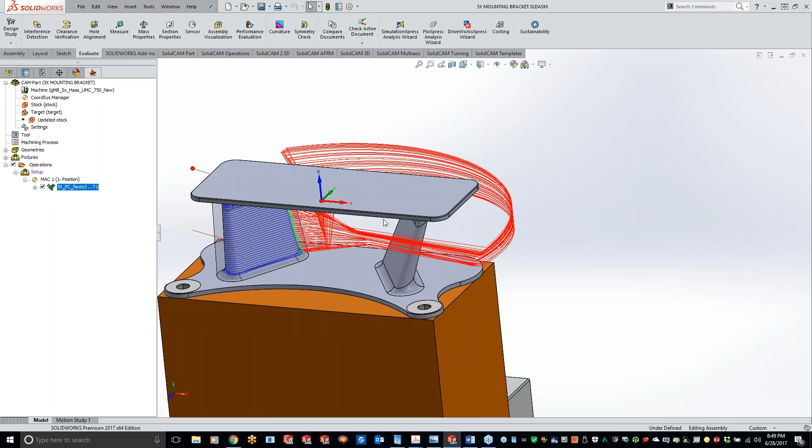Okay, and I was just going to bring up the part from last week that I was talking about, for those of you guys that didn't get to see it. So this one, doing that 5-axis, we could do parallel to curve on this one too, but we just did parallel to surface. But using that gouge check against the holder and the arbor to make sure we're not whacking out that fin right here as it's going around. So just do a simulate here, machine sim.

And we can definitely play this or speed this one up here. And you can kind of see it's kind of overlapping and avoiding with that holder and that last fin. So yeah, see, Jeff, you're even teaching Clarence and some of our other guys that didn't even know that.

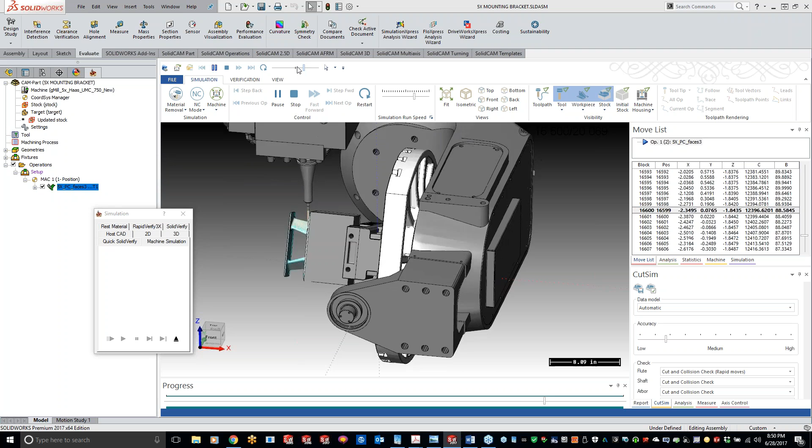Appreciate that. All right, so any other great tips or tricks there? You should have Jeff come in here. We got a bunch of people didn't even know about that curvature tool, so yeah. But no, I appreciate all the input from all of you guys. It's real nice to see that you guys are putting your feedback in there too, and keeping me up on my toes and showing me something new as we go too. So I really do appreciate that. And do we have any other questions regarding the parallel to curve?

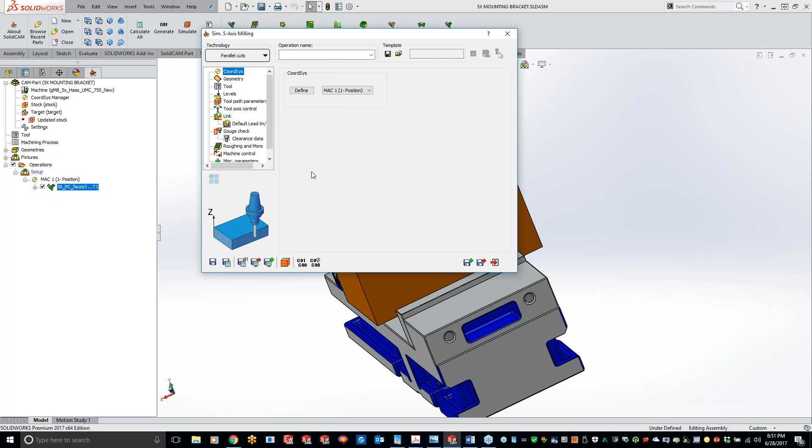So next week we are going to be hopping into, what is next week? Multi-axis. So we will be doing parallel to surface. Now, I was kind of thinking about this yesterday, and we're doing parallel cuts, parallel to curve, parallel to surface, all this. Well, we already kind of covered what all this kind of does, more in a sense, when we were going over the HSS. And we'll still kind of go through it with 5-axis, but we'll try to find some more parts that kind of utilize more of this bottom stuff here that you may not use on a day-to-day basis.

So we'll still kind of follow along these lines here, but I'm not going to really solely base on perpendicular curve, because like I said, we've already kind of covered it. I don't want to bore you guys and recover material that we've already covered. And I know it's late at night, so I don't need you guys falling asleep on me, but I think if we kind of get more into the depth of using some of this stuff, and it's going to be tough, but if you guys do have parts that you would like to see the 5-axis done on, definitely send those over to me, and we can add those in there as long as you're okay with the whole world being able to see it.

And same thing down here, like I said, my go-to ones are always going to be follow ISO lines, orthogonal at each position, and orthogonal at each contour. But these ones down here I don't use hardly ever. So we'll try to break me out of my habits there and start using some of those on some of these next parts coming up. But like I said, guys, if you have suggestions or ideas, definitely send those over to me.

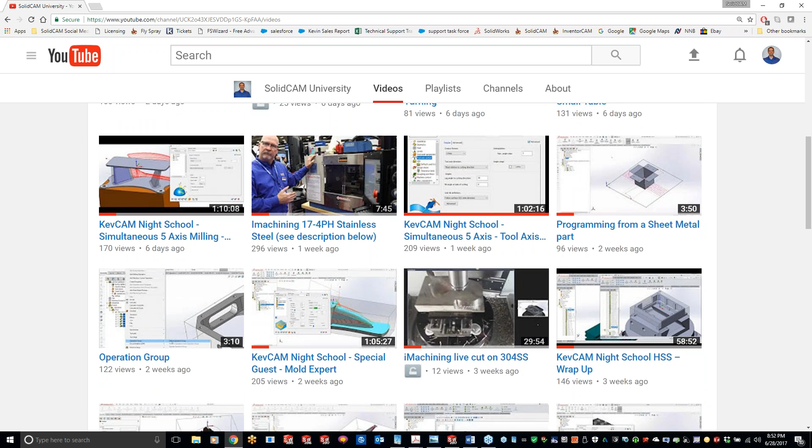All right, guys. Well, thanks again for sitting through another night class, and hopefully you guys got something out of it. I know I sure did by Jeff, so I really appreciate that, Jeff. And Ronnie with the drive direction going deeper or shallower.